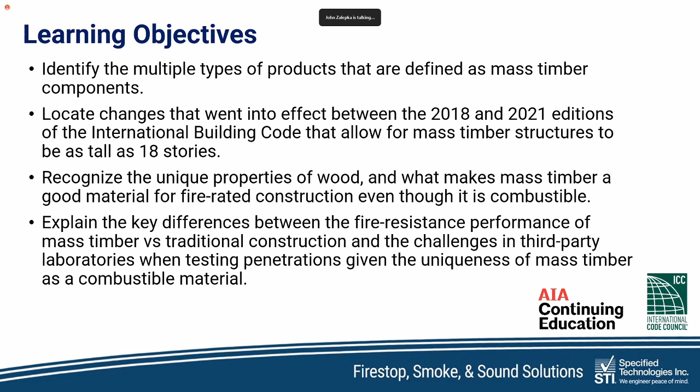At the end of today's program, you'll be able to identify the different types of mass timber components. You'll be able to locate changes of mass timber code over the last 3 years. You'll be able to recognize that even though it's combustible, there are some unique properties of wood that make it suitable for fire-rated construction. And finally, you'll be able to explain the differences between mass timber and traditional construction fire stop testing. And with that, I'll turn it over to today's presenter, Tim Mattox.

The floor is yours. Thank you, John. I appreciate the introduction and want to welcome you to today's webinar. Today, we'll be discussing fire stopping in mass timber construction.

Cross-laminated timber, or CLT, is the most common material used in mass timber projects and was developed in Europe in the early 1990s. The first noted construction project for public use that utilized cross-laminated timber was in 1996 in Austria. The first recognized commercial project in the United States was in 2016.

Growth of the industry has surged since then in light of efforts to control atmospheric carbon, and as such, major code changes were proposed for the 2021 IBC, which were adopted, significantly changing the way Type 4 construction is addressed. These code changes prompted a serious amount of attention to be focused on mass timber construction, which had been lacking before. This is especially true as it relates to fire protection, which of course is important to understand as wood is, in fact, naturally combustible.

Our conversation will begin with an overview of different types of mass timber materials used in mass timber construction today. From there, we will talk about the sheer size of some of the projects that have been built, as well as those that are being planned for the future.

Next, we will talk about code changes that happened between 2018 and 2021 in the IBC that significantly changed the landscape of mass timber structure allowances and the wood surface visual exposure limitations for each Type 4 group.

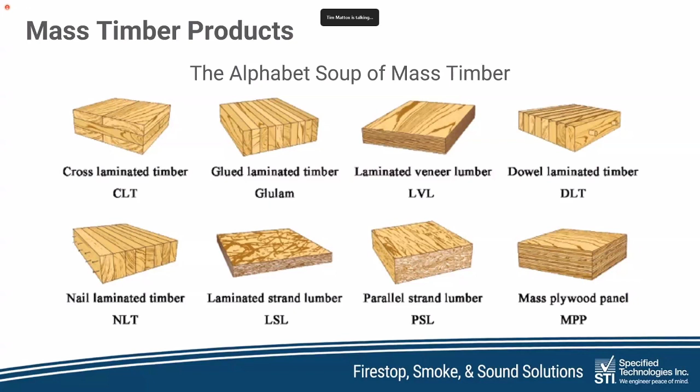If you're like me, it was not that long ago when you first heard the term CLT. Maybe the first time you heard it was in the introduction to this presentation. But what most people are unaware of is that there are several more building products on the market used in mass timber construction today. It is a bit of an alphabet soup, as all of these products are more commonly referred to by their shortened acronyms: CLT, glulam, NLT, DLT, LVL, LSL, PSL, and MPP can be present on various mass timber projects today, and over the next few slides, I will talk about these different materials and their common uses.

Let's start with the most commonly used mass timber product, cross-laminated timber, or CLT. Cross-laminated timber is a subcategory of engineered wood. It is a wood panel product made from gluing layers of solid sawn lumber together. CLT has multiple application orientations and can be used in floors, walls, and roofing.

CLT is produced with an odd number of layers. The thinnest CLT is 3-ply. The most common used in construction are 5-ply, 7-ply, and 9-ply. Individual plies can have the same thickness or can be of varying thicknesses and are always placed 90 degrees in fiber orientation on each successive layer.

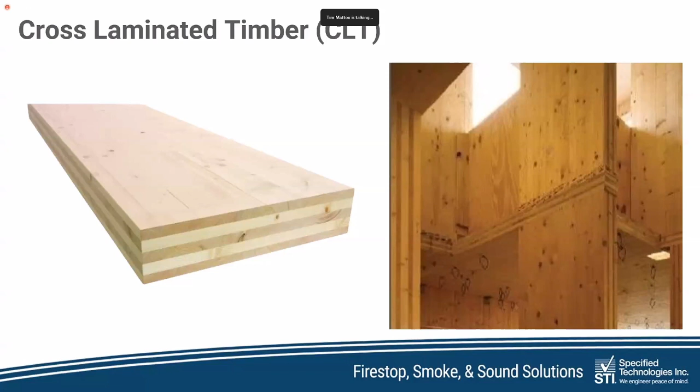To give perspective on how quickly this industry is growing, I visited a CLT manufacturing plant in Canada last year, and they informed me that their production has increased 7-fold year after year for the past 3 years running. That is not growth, that is an explosion.

Mass plywood panels, or MPP, are becoming more common. MPP is a massive, large-scale structural composite lumber-based panel designed as an alternative to concrete and steel, and actually to cross-laminated timber as well. MPP is essentially multi-tiered plywood using thin veneers that are laminated with fiber orientation alternating on each successive layer. Similarly to plywood and CLT, MPP can potentially achieve the same structural attributes of a CLT panel using 20% less wood.

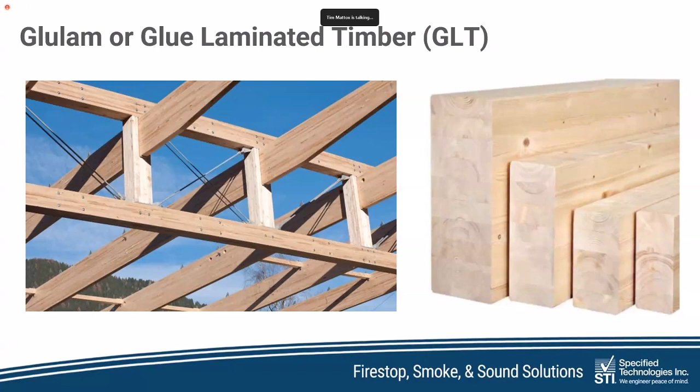Glue-laminated timber, most commonly known as glulam, is very common on all mass timber projects and is made with multiple layers of solid wood lumber bonded together with a high-strength adhesive to form a single structural unit. Glulam is oriented such that the grain of all lamination runs parallel with the length of the member. Applications include straight beams, lintels, purlins, ridge beams, floor beams, and columns. You will also see glulam for round, square, and complex sections, tied rafters, trusses, tied arches, arch supports, and curved beams.

Nail laminated timber, or NLT, uses nails to connect dimensional lumber in successive layers. NLT has multiple uses, and one major benefit is that it can be constructed on or off site and is often used to create complex shapes, such as the one shown in this photo on the right, as opposed to the straight sections you would normally find with other mass timber materials.

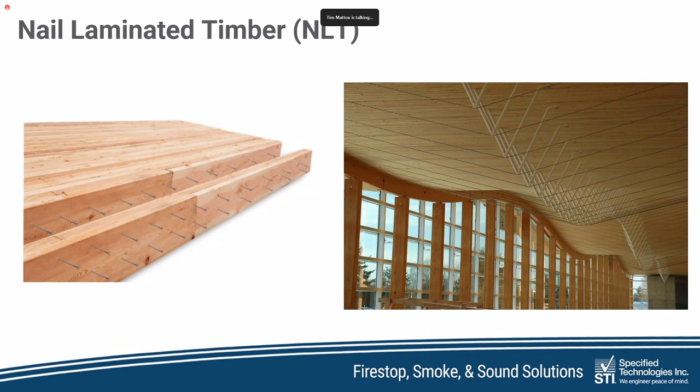A different form of mass timber product altogether is structural composite lumber, or SCL. Parallel strand lumber, or PSL, is manufactured from veneers clipped into long strands, laid in parallel formation, and bonded together with an adhesive to form the finished structural section. It is commonly used for beam and header applications where high bending strength is needed. PSL is also frequently used as load-bearing columns.

Similar to PSL, laminated strand lumber, or LSL, is made from flaked wood strands and is used in a variety of applications from studs to millwork components.

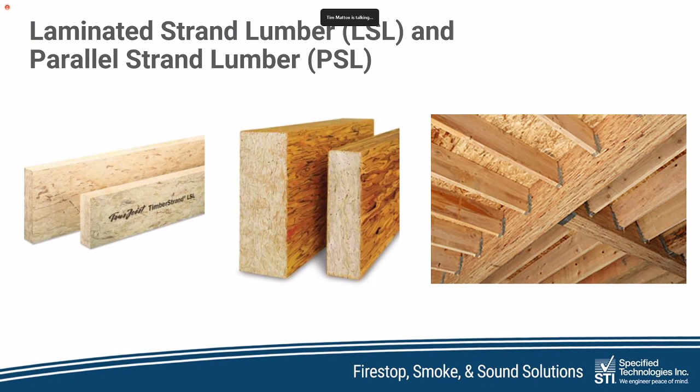Also part of the structural composite lumber family, laminated veneer lumber, or LVL, is a widely used structural composite lumber product. It is produced by bonding thin wood veneers together in a large billet so that the grain of all veneers is parallel to the long direction. LVL is a bit of a cross between mass plywood panels and glulam. It is similar to MPP in that it uses thin veneers adhered and pressed together. Although, because it is commonly used as a structural member, the wood grain is always oriented parallel to the long dimension of the structural unit, and in that way it is similar to glulam.

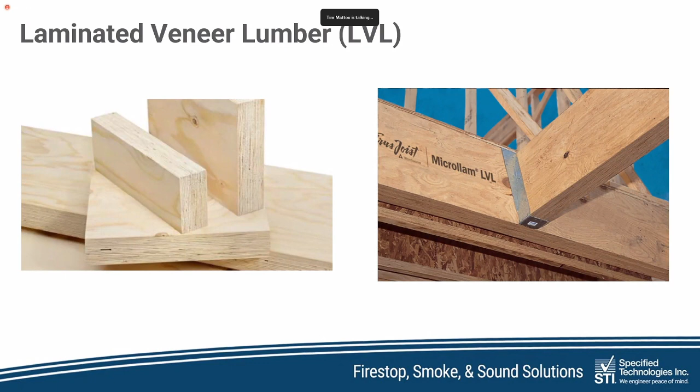Speaking of gaming enthusiasts, here's a fun memory. In the movie War Games, David Lightman tried to access a video game company server so he could hack into the new games before they were released. This fictitious company was Protovision, located in Sunnyvale.

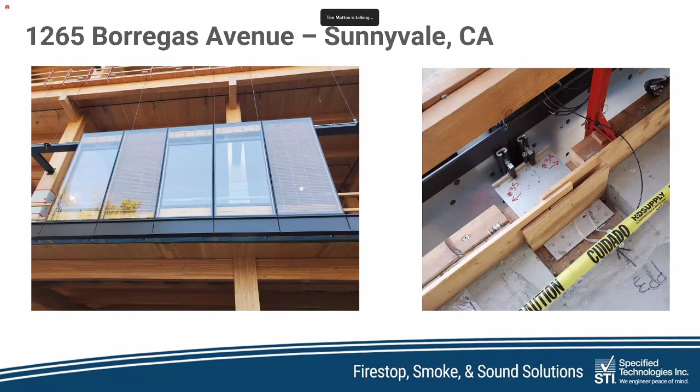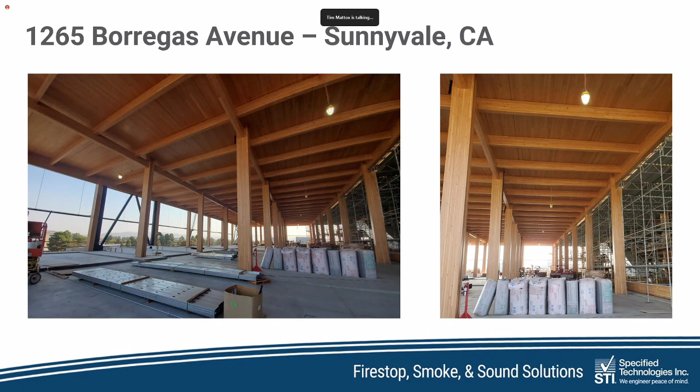These photos show the 20-foot ceiling height in the common areas of the structure, and you can see the glulam columns and beams as well as the underside of the CLT floor above. By code, these visually exposed wood surfaces can be left fully exposed, as we will see later in the presentation.

Here you can see where the glulam beams are supported by the columns and how they tie into the perimeter glulam beams. On the right, you can see the 3-ply CLT floor along with the steel pour stop for the concrete topper. On the left, you can see the gray weather barrier membrane capping the end of a 5-ply CLT roof.

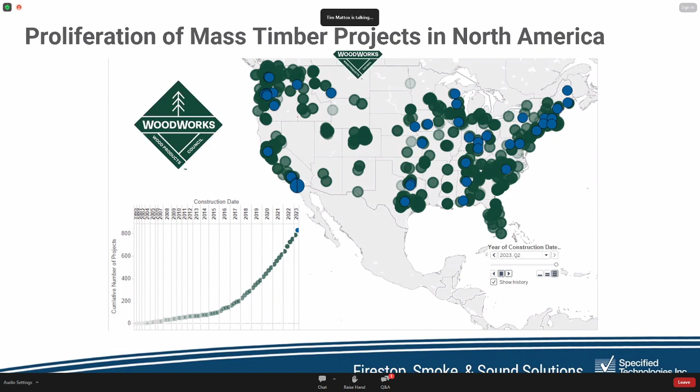From the very first mass timber structures built in North America, this chart shows how the number of these projects have increased over the years and where they predominantly exist. As of June 2023, there are a total of 1,860 multifamily, commercial, or institutional mass timber projects in the United States that are either in progress or completed. Keep in mind, the first major structure in the United States was built in 2016, and this is when the proliferation of mass timber projects started escalating in the U.S.

Now we will talk about various large-scale projects that have been constructed in the U.S. and abroad, and we will also show the largest project plans currently being looked at throughout the world. The image here is of the Cleveland Intro project in Ohio City, Ohio.

Just across the iconic Hope Memorial Bridge from downtown Cleveland, sometimes called the Guardian Bridge, namesake of the Cleveland Guardians, this building was finished in 2022 and is located across the street to the south from the famous West Side Market in Cleveland. Standing at 130 feet in height with a massive 653,000 square feet under roof, this project is not the tallest in the U.S., but it is currently the largest mass timber building in the world. It is 9 stories tall, with 7 stories of mass timber built over 2 stories of concrete podium, providing space for both commercial and residential occupancy.

Shown here are photos taken in February 2021, where you can clearly see the glulam columns and beams, as well as the 7-ply CLT floors used on this level. Below, you can see the concrete-based structure. This building services residential and commercial tenants and has been finished and occupied since April 2022.

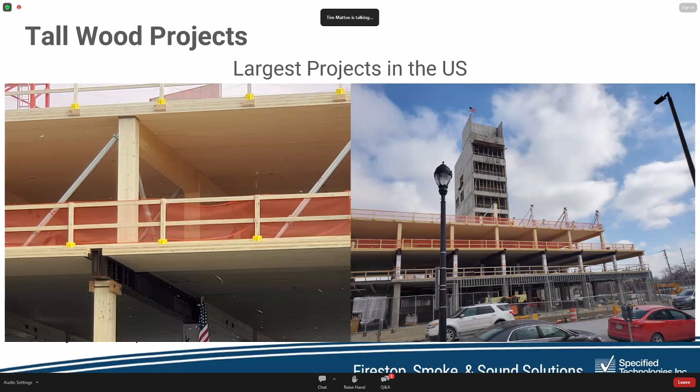This project is the Ascent project in Milwaukee, Wisconsin. It is 25 stories tall and stands at 284 feet. This height makes it the tallest mass timber structure in the world currently, but that will not last for long. It's quite interesting that both of these projects exist in the upper Midwest and not on the West Coast, as you might think.

The tallest proposed projects in the U.S. currently include the Spar project in Portland, Oregon, which would stand at 299 feet with 48 stories. Next is the Timber Towers project in Philadelphia, which would stand 62 stories tall. The tallest proposed structure in the U.S. currently is the River Beech project in Chicago, Illinois, which would stand 748 feet tall with 80 stories.

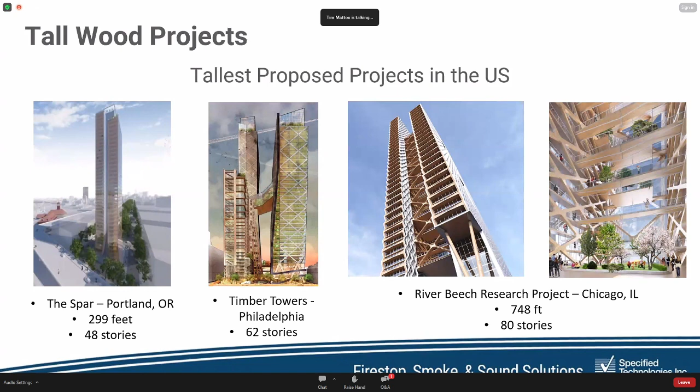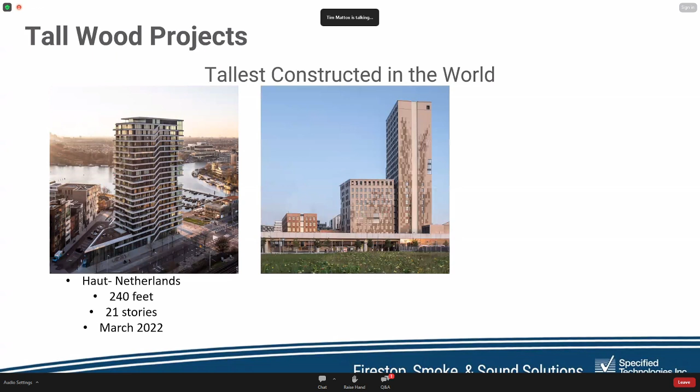The tallest mass timber projects in the world currently built, besides the Ascent project in Milwaukee, include the Haut residential project in Amsterdam, standing at 240 feet and 21 stories, built in March 2022. Next is the Hoho Tower in Vienna, Austria, standing at 276 feet and 24 stories, constructed in December 2019. And the Mjøstårnet Tower in Norway, which stands at 279 feet, 18 stories, completed in March 2019. The Ascent project stands taller than all of these at 284 feet, a mere 5 feet taller than the Mjøstårnet Tower in Norway.

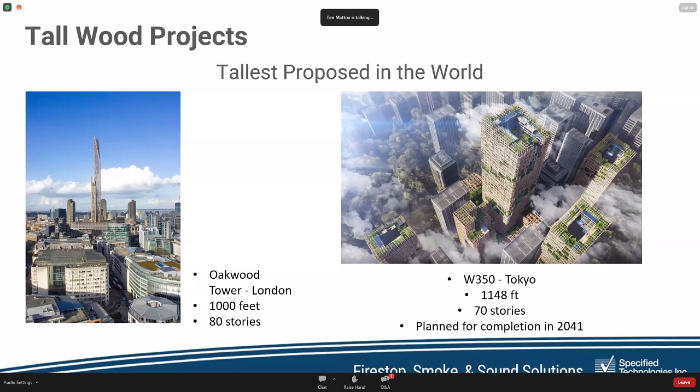The tallest proposed projects in the world include the Oakwood Tower in London. This structure would be among the tallest buildings in downtown London, standing at 1,000 feet and 80 stories. Finally, the tallest proposed project in the world is the W350 project in Tokyo. This project, when completed, would stand 1,148 feet tall and cover 70 stories. The plan is to have this project completed by the year 2041.

Now let's switch gears and talk about major code changes that took place between the 2018 IBC and the 2021 IBC that spurred much of the mass timber frenzy we see today. Shown here is Table 601 in the 2018 IBC, which highlights the required fire resistance ratings for building elements for all 5 types of construction. This section would be used to address mass timber construction for any jurisdiction using the 2018 IBC or anything before it. The major item to note is that all types of construction have an A and B group under the type, except for type 4. Type 4 shows only one header, and that is HT, which stands for heavy timber.

It is important to note that there is a difference between heavy timber and mass timber. Heavy timber is more representative of a true building type, whereas mass timber is more relevant to a material type that is set aside for Type 4 structures.

The code references here represent the entirety of CLT reference in the 2018 IBC code. In Chapter 6, there are two references for different types of materials that can be considered under Type 4 construction, and surface covering materials required to be placed over CLT. Chapter 7 addresses the calculation of fire resistance for visually exposed wood members and wood decking, but does not mention mass timber elements by name. The rest of the references in Chapter 23 are simply specifications on minimum thickness requirements when CLT is used in specific applications.

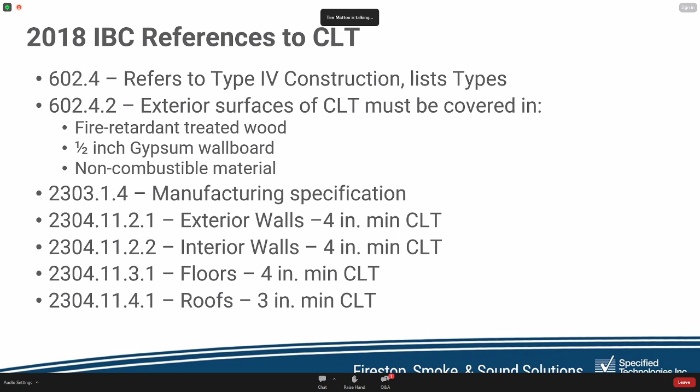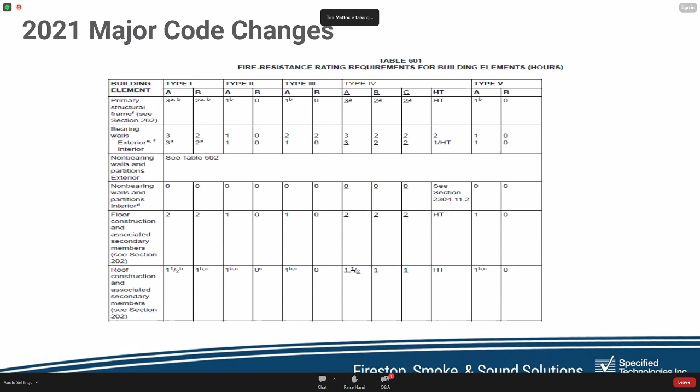Switching now to the same table in 601 of the 2021 IBC, you can see there are some major changes. No longer is Type 4 the only construction type that doesn't have two subtypes under the Type 4 header. Now there are four subtypes to include types A, B, and C, along with the HT designation that already existed. However, mass timber construction is not limited to Type 4 - that is simply a dedicated building type for a complete mass timber project. In fact, you could find mass timber projects within this entire window of building types. One major difference between Type 4 and other types is that the horizontal separation requirements for all Type 4 construction are 2 hours, whereas in Types 3A and 5A, for example, the minimum requirement is 1 hour.

Proposed changes added types A, B, and C to the height tables and allowable stories. With the changes, Type 4C can be built to 9 stories at a maximum of 85 feet.

Excuse me, I've got a phone ringing in my room here.

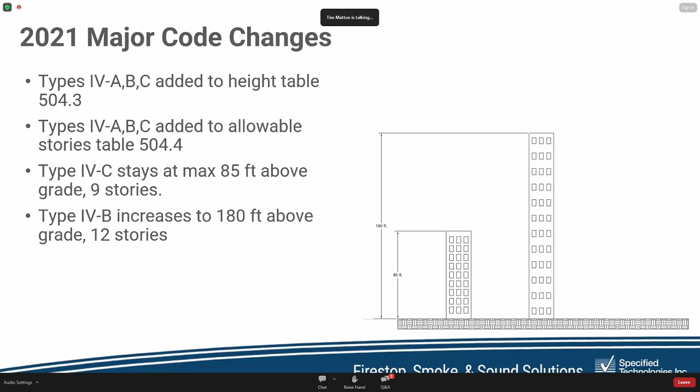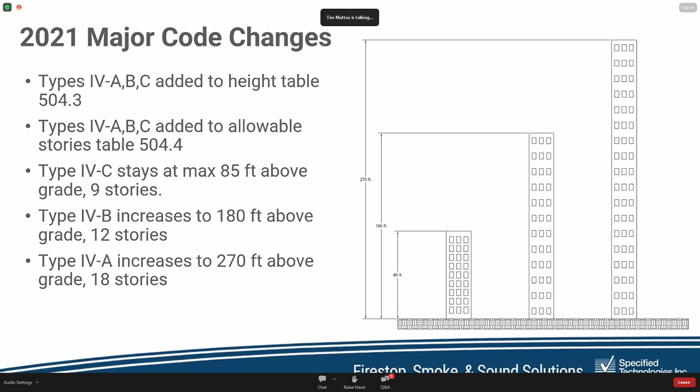Type 4B increases that maximum height to 180 feet and 12 stories. Finally, Type 4A allows heights up to 270 feet with 18 stories. The maximum allowances are contingent upon the occupancy type. These listed here are the maximum allowable for qualifying occupancy types.

The first major proposed change set the requirements for the allowable visual exposure for each of the new types of mass timber construction. The tallest of the group, Type 4A at 270 feet and 18 stories, requires that all walls and ceilings must be fully protected, and the finished floor must include a minimum 1 inch of non-combustible material in conformance with Section 804 of the code.

Type 4B at 180 feet and 12 stories allows for up to 20% of the ceiling to be visually exposed, or an equivalent of 40% of the floor area to be allowed to be visually exposed on walls or columns. So if you have 1,000 square feet of floor space, 200 square feet of ceiling, or 400 square feet of wall surface can be left visible. You can also have a combination of ceiling and wall visually exposed as long as it follows the mixed unprotected area exposure formula in the code. The floor must be protected with a non-combustible topping, as it is in Type 4A.

Type 4C is much simpler. For any structure 9 stories or less and 85 feet or less above grade, there is no requirement for any surface to be covered - you can leave walls, columns, and ceilings fully visually exposed. The floor finish is not required to be non-combustible, but must be in compliance with Section 804 of the code.

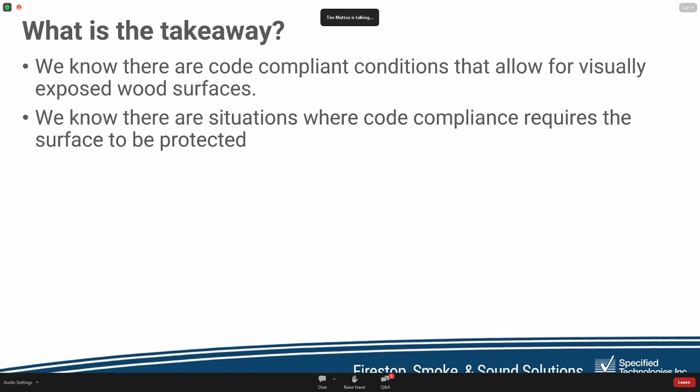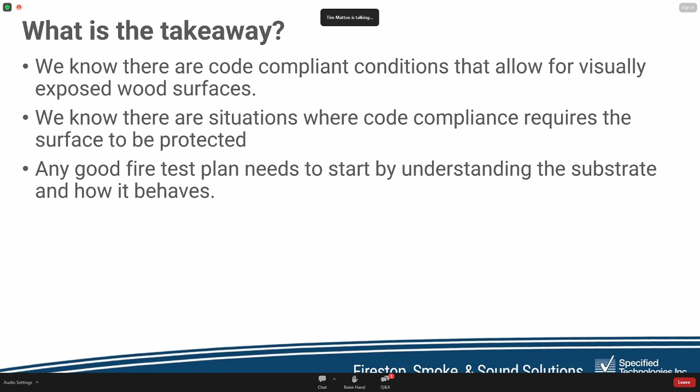From the new allowances in the code, we understand that there are code-compliant conditions that allow for wood surfaces to be completely visually exposed. We also understand there are situations where code compliance requires that the surface be protected. Logically, it follows that in order to develop a good test plan, there really needs to be a fundamental knowledge of the material you're working with, how it behaves as a construction material, and more importantly, how it behaves in a fire. In the next few slides, we will look at some of the fundamentals of how wood behaves.

The first lesson: wood is good, but strange. I cannot take credit for this statement. Back in 2009, Dr. Joe Lstiburek, one of the premier building scientists in North America and principal of Building Science Corporation, wrote an article with this title. It is a fascinating article and one that I highly recommend reading.

In his leading statement, he said if someone invented wood today, it would never be approved as a building material. It rots, it burns, it has different strength properties depending on its orientation, no two pieces are alike, and most cruelly of all, it expands and contracts based on relative humidity.

I'll summarize some of what Joe wrote in his article, discussing what happens when wood is warmed, when it is exposed to humidity, and why this is important both from an architectural standpoint as well as a fire protection standpoint. We will also look at answering the following questions.

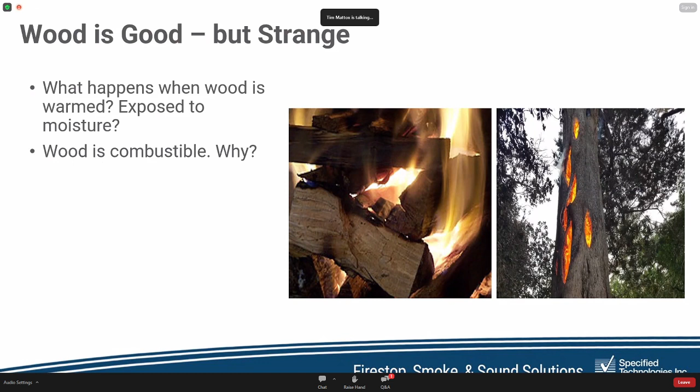What about wood makes it combustible? It almost always has a considerable amount of water within its cellular structure. Isn't that a good thing? What are the differences between mass timber when compared to more traditional construction?

How does it compare to wood framed construction? How is fire resistance calculated in CLT floors and walls? How does it hold up structurally as the wood is consumed? Doesn't it lose strength? Finally, we will ask what aspects of wood make it a good construction material, considering its natural combustible nature.

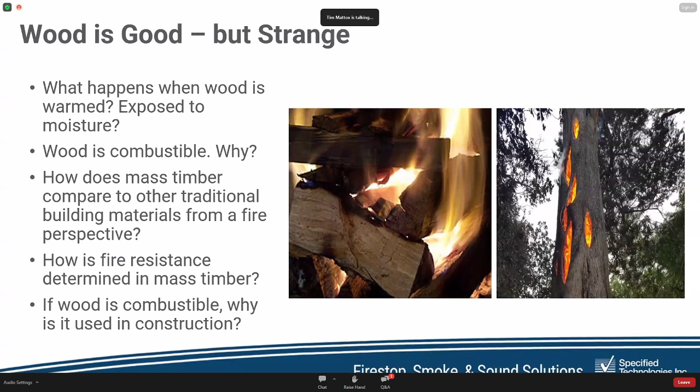So let's look at wood and why it is good but strange, and we will start with its relationship with relative humidity. Wood is hygroscopic, which basically means moisture content in wood adjusts to atmospheric changes in relative humidity. I will be saying relative humidity a lot, so from here on out, I will call it simply RH.

Why is this important? Well, if you're an architect, you may want to understand how this can affect the dimensional stability of the wood. Wood expands at a much higher rate perpendicular to the grain than it does parallel to the grain. This means if you're using dimensional lumber framing and RH increases, the length of the stud will not vary much, but they will get wider and thicker.

Fortunately, with engineered wood such as CLT, the fibers are oriented perpendicular with each successive laminate layer, and this does create some stability in this regard. If you are a fire protection engineer, however, you may be less concerned about dimensional stability and more concerned with moisture content, in particular lower moisture content.

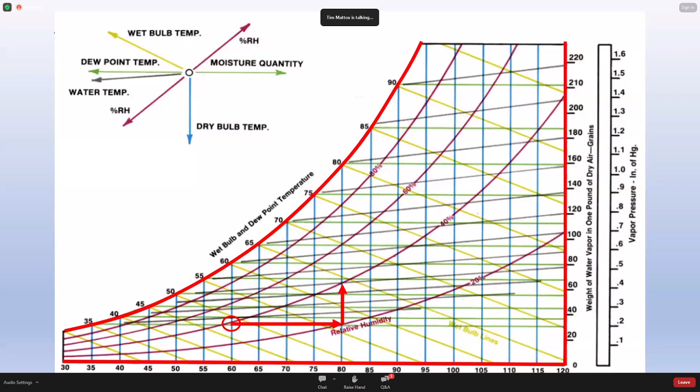Wood dimension responds differently than other building materials because it is affected by changes in relative humidity instead of temperature. That is important to know in designing wood for use in buildings, but no less important to the fundamentals is understanding how and why wood burns.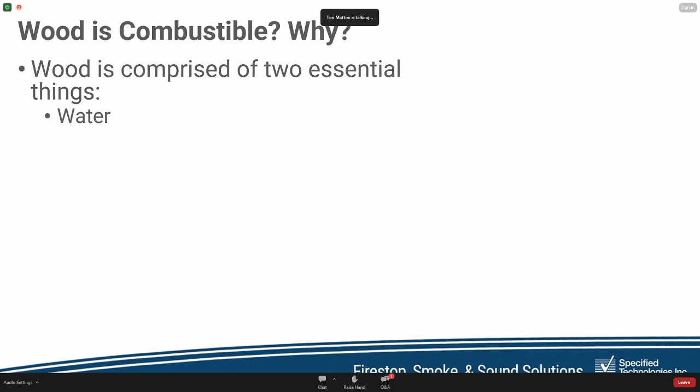Let's start with the why. Wood is comprised of two essential elements. First is water. Wood will always have some level of moisture because it comes into moisture equilibrium with the environment. Fresh cut lumber can have moisture content as high as two times the mass of dry wood. After wood is dried for lumber, the normal moisture content lies between 8 and 25%.

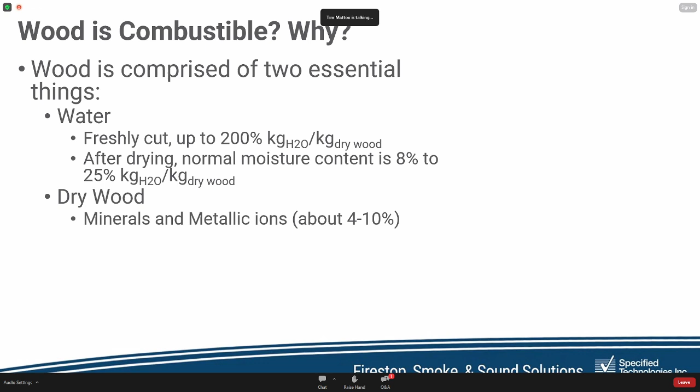Now we're talking organic polymers. That sounds combustible, and it is. This is the core combustible material found in wood. These polymers are comprised of lignin, which is about 18 to 35%. Lignin is the kind of glue that holds everything together.

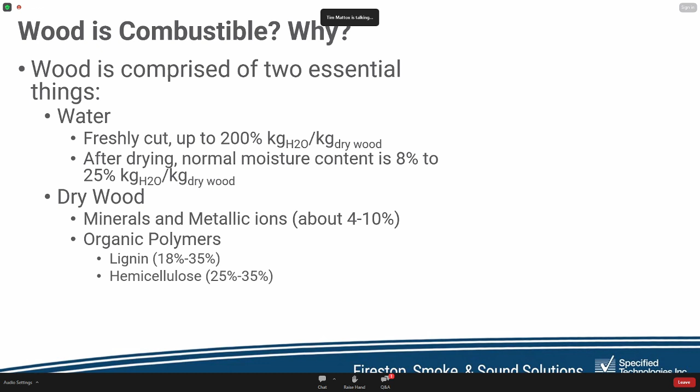Then the cells are made of hemicellulose at about 25 to 35%, and finally cellulose, which makes up about 50% of the dry wood. Very simply, hemicellulose and cellulose are sugars, and sugar is quite combustible.

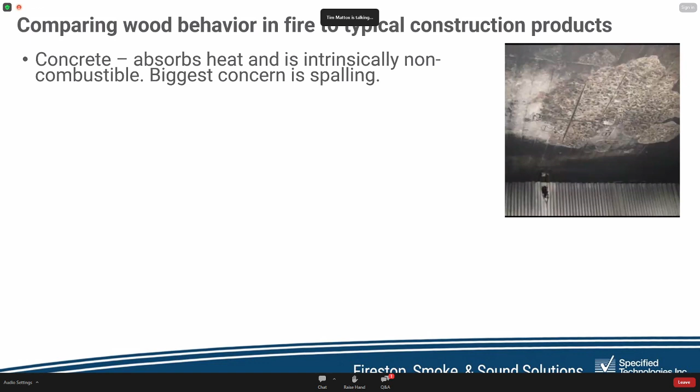Let's look at some other materials and how they compare when exposed to fire conditions. Concrete is very simply a massive material that absorbs a ton of heat. None of the components that make up concrete are combustible, and the biggest concern for concrete in a fire is explosive spalling if the moisture content is too high. Concrete does exhibit some expansion with heat, especially if there's steel embedded in the concrete close to the heated surface.

Gypsum wallboard is a very interesting material. The way gypsum works and why it is an excellent material for fire protection is that the gypsum, or calcium sulfate molecule, has water molecules chemically bound to it in its natural form. It is dry to the touch, but when exposed to heat, gypsum will release the water molecules in a process called calcining, and the released water will convert to steam, which cools the assembly close to the boiling point of water and well below cellulosic ignition temperatures.

The calcium sulfate is a non-combustible mineral base. The water molecules serve as a bit of a binder, so when they are gone, the gypsum is essentially powder that has little to no structure.

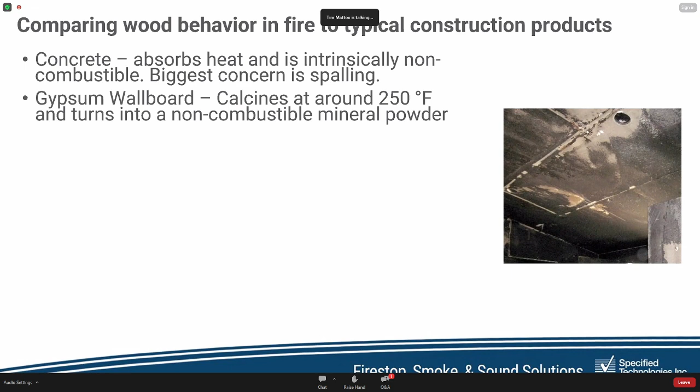Steel expands fairly rapidly as it heats. Steel will retain a significant portion of its strength up to about 1,000 degrees Fahrenheit, when it will start to exhibit plastic deformation when under load. This is why fire test standards for testing fireproofing materials use 1,000 degrees Fahrenheit as the failure criteria. Steel melts at about 2,600 degrees Fahrenheit.

Dimensional wood has been used as a framing material for years, but the frame is encapsulated by various materials, usually gypsum wallboard, to provide the fire-resistive element.

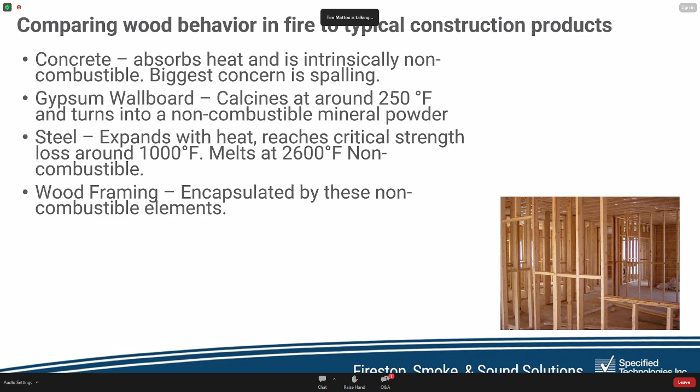Conversely, mass timber surfaces will ignite at around 500 degrees Fahrenheit and start to produce char. The base char rate for CLT, per the National Design Specification for Wood Construction, or NDS, is 1.5 inches per hour. But for design purposes, the effective char rate is used, which ranges from between 1.8 and 2.2 inches per hour, depending on the thickness of the plies.

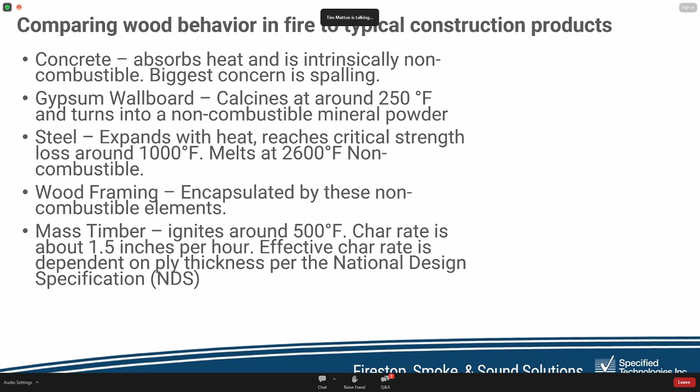When designing for load bearing with mass timber, you always want to end up with enough wood to carry the design load after the prescribed fire resistance time has elapsed. When you are designing for fire resistance with mass timber, you start with the design load, and then you use the char rate calculation tables in Chapter 16 of the NDS.

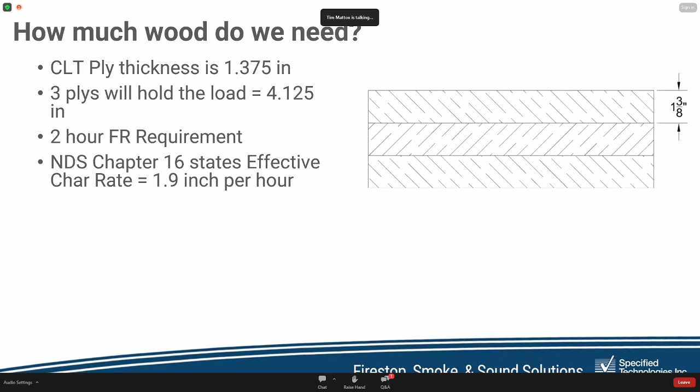Here's an example on how this may be calculated using CLT with 1 3/8 inch plies. Say your design requires 3 plies of wood to maintain the design load, and you have a 2-hour rated design requirement. NDS Chapter 16 indicates that the effective char rate of 1 3/8 inch ply CLT is 1.9 inches per hour.

1.9 inches times 2 hours is 3.8 inches, and you can see we are well into the 6th ply at this point. At the moment, we have calculated that we need 3.8 inches of effective char, coupled with the 4 1/8 inch thickness to hold the load.

So we are at 7 15/16 inches. 7 15/16 inches divided by the ply thickness of 1.375 is 5.76 plies. So we've calculated we need 6 plies, but remember from the CLT discussion, CLT is only manufactured in odd ply numbers, so we actually need 7 plies to meet this design criteria.

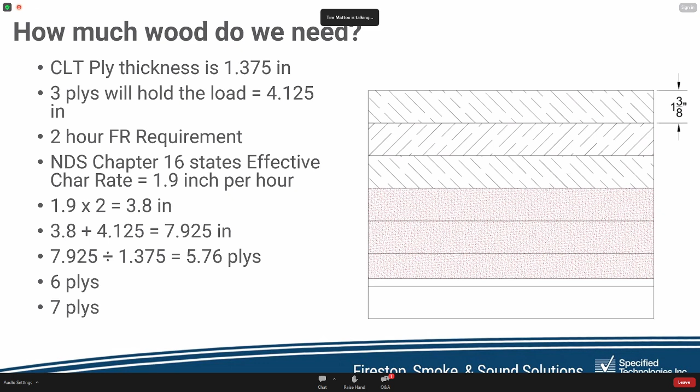So why should we use wood if it burns? It's a good question. For starters, wood burns in an ablative process. This photo very clearly shows this glulam beam on the left is untouched, and the one on the right has obviously seen fire, but yet the core of the beam looks identical to the one on the left.

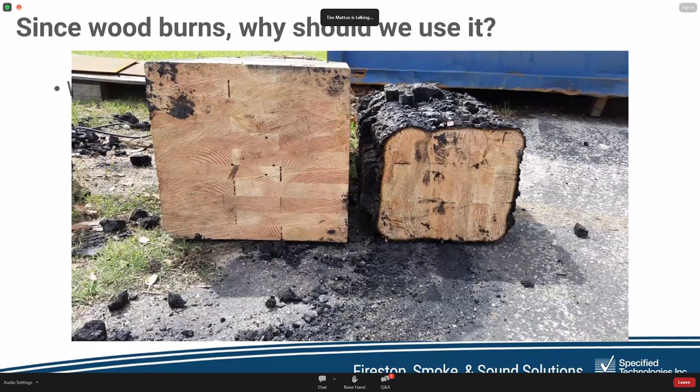Wood first forms a char layer, which is essentially all carbon mixed with the minerals intermixed. The carbon layer is solid, but it has lost much of its structure. The carbon then burns away, leaving the minerals or ash that has no structure. The ash falls away or sloughs away to reveal the new char layer below that has already started as it supports combustion. But as well, the virgin material below is still protected. This process repeats, and this is what we call an ablative process.

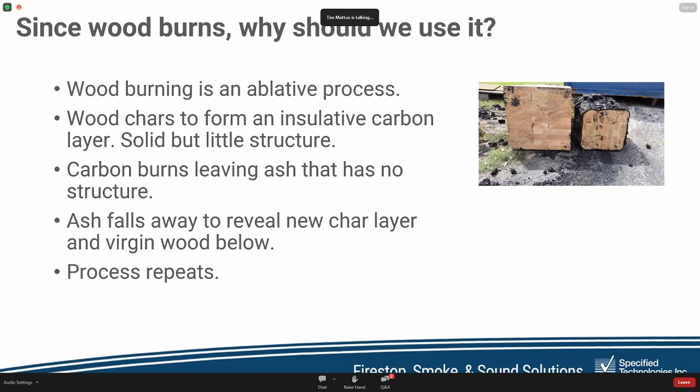There are essentially three stages of wood burning. The first stage is called the smoking stage, when the wood begins to lose its moisture. Some will be lost to the fire, other moisture will be driven inside, which preserves the core virgin wood. CO2 is released, and this process happens until the wood temperature is about 400 degrees Fahrenheit.

The second stage is called the pyrolysis stage. This is when you have the realization that your campfire is burning on its own. Pyrolysis is the conversion of the combustible compounds in the wood to volatile gases, and this is what supports the flaming and further breakdown of the wood. This happens between 400 Fahrenheit and 850 Fahrenheit.

The final stage is called carbon burn, and this is where the carbon is turned into carbon dioxide and carbon monoxide, leaving nothing but the ash or any other char or virgin wood that may be involved in other stages at any given time.

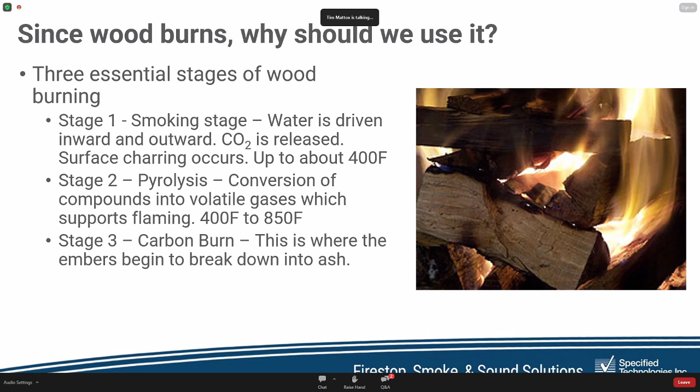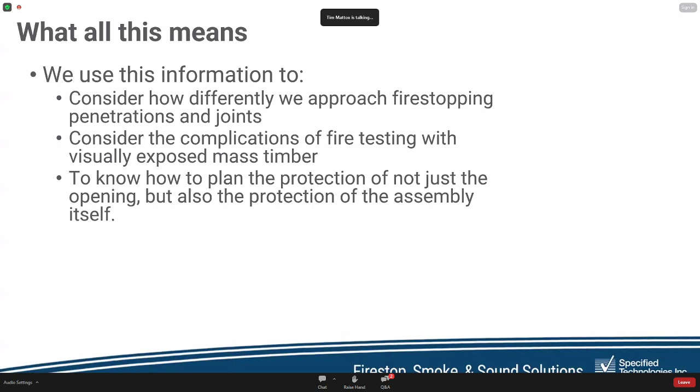When we look back on these behaviors of wood, what does it all mean? How can we use this to understand how to properly fire stop? Well, we use this information to carefully consider how we approach fire stopping penetrations and joints. Should we include protection within the annular space in a way of insulation? Can we use point contact? How is the mass timber assembly going to behave differently than a concrete slab or a gypsum wall? Should we protect the assembly or leave it fully visually exposed? In other words, we actually still have a lot to learn.

So all of this is interesting, but how do we apply what we have learned to testing penetrations or joints for that matter? Well, in putting a test plan together, the first thing we had to discover for ourselves was how long of a duration we could expect. We know how to calculate fire resistance per the NDS, but practically speaking, we needed to know when a fire was going to start peeping through the assembly. How long will it last unprotected?

Well, this is important to know because sometimes ceilings do not require protection. How much additional time can we expect when adding a layer of gypsum wallboard to the ceiling? Again, this is important because some ceilings do require protection. What types of penetrating items would be good to analyze in determining how we might do things differently with CLT versus the concrete floor assembly? Finally, how do we push the limits of these test assemblies successfully?

Like all good plans, you have to know where to start.

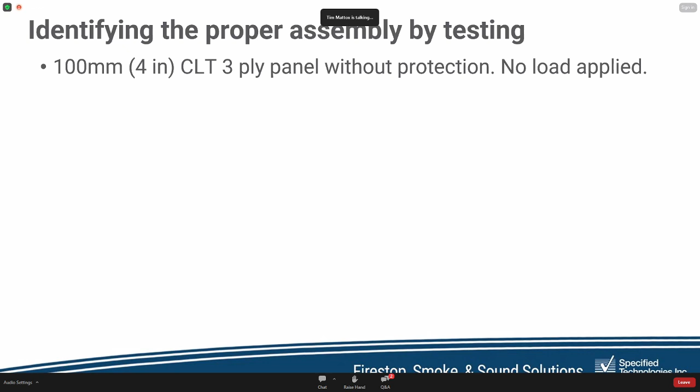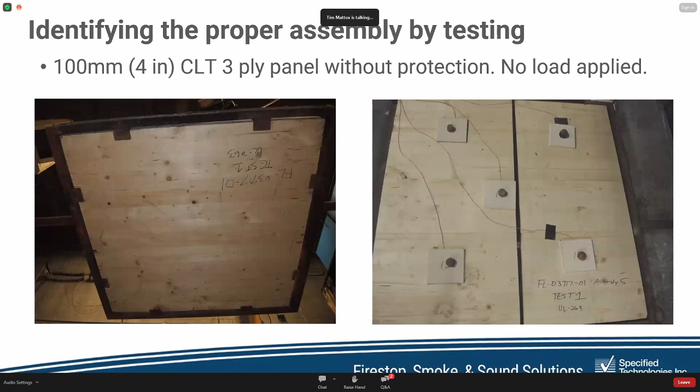Recently, we ran some fire tests on 100 millimeter 3-ply CLT floors. To start, we wanted to understand how long this assembly, without protection, would last under fire exposure for the ASTM E119 time-temperature curve. The photo on the left shows the underside, or exposed side, of the CLT floor. The right side shows the top, unexposed side of the assembly. You'll notice pads weighted down with steel blocks and wires leading out from under the pad.

These are the thermocouples used to measure the unexposed surface temperatures as the fire test proceeded. The end of the test was marked when we noticed flaming on the unexposed surface at 90 minutes into the test. The maximum surface temperature rise was only 199 degrees Fahrenheit, a full 126 degrees lower than the standard allows. That goes to show the excellent thermal resistance of CLT.

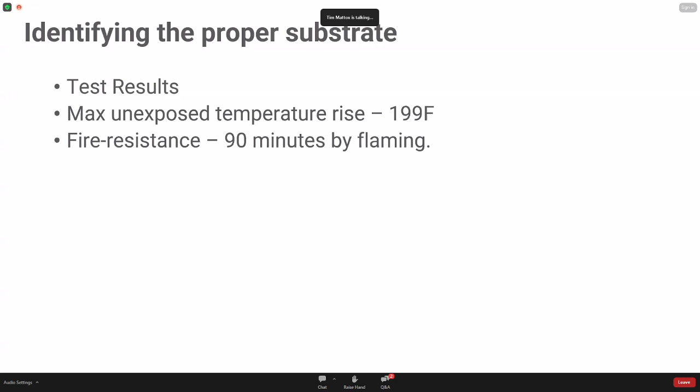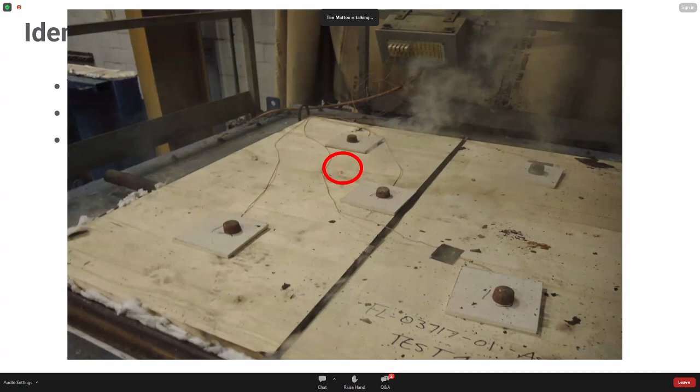The flaming occurred on a seam between the CLT boards on the top ply. It may be difficult to see, but look for the light orange glow at the center of the red circle. The center photo shows the flaming about 5 seconds after the flame first appeared on the unexposed side. This is a photo of the assembly as it's being lifted off the furnace.

As you can see, it is fully involved, and you're seeing every stage of wood burning. The ash has already fallen into the furnace floor, so at some point carbon burn was complete. You also have carbon burning, pyrolysis, as well as smoke stage burning occurring on the top surface.

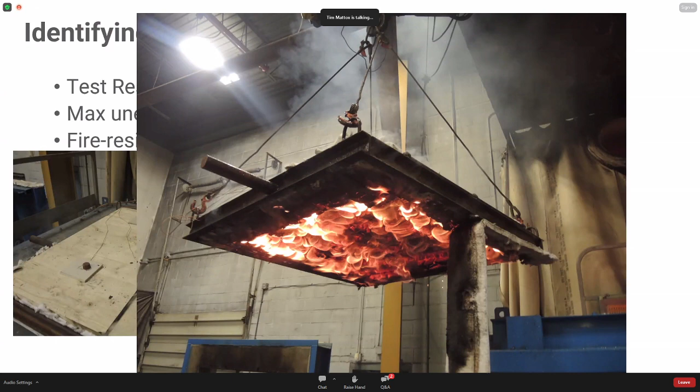This graph shows the temperature as measured in the furnace compared to the E119 time-temperature curve. The orange line is the E119 time-temperature curve for the assembly 1 test. As you can see, there was a deviation in the furnace temperature that began around 45 minutes into the test. This is likely due to the ablative nature of the wood burning, and when the char had sufficiently attacked the first adhesive bond layer to cause delamination.

This exposed a fair amount of slightly charred underlying wood immediately. Immediately afterward, the wood from the second ply became involved, and the heat generated by the fresh wood outpaced the heat energy from the furnace fuel, causing this deviation. So between 45 minutes and roughly 80 minutes into the test, the furnace gas was shut off and the furnace temperature was driven by the fuel from the CLT. Internally, we call this secondary flashover.

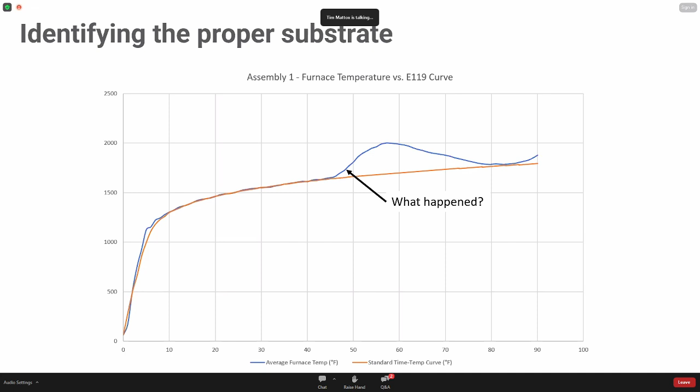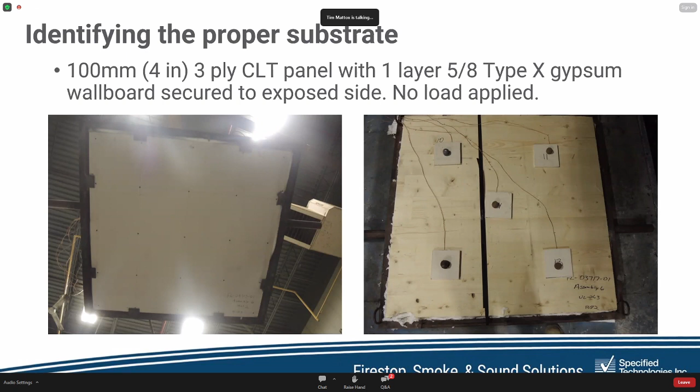Since the unprotected assembly only passed 90 minutes, it was decided to run a second assembly with a single layer of 5/8 inch Type X gypsum wallboard mounted to the underside. The photo on the left shows the exposed side of the test assembly, showing the screws securing the wallboard, spaced on a 12-inch by 12-inch grid. The photo on the right shows the unexposed side of the assembly prior to the test, fitted with 5 thermocouples in the same locations as the first test.

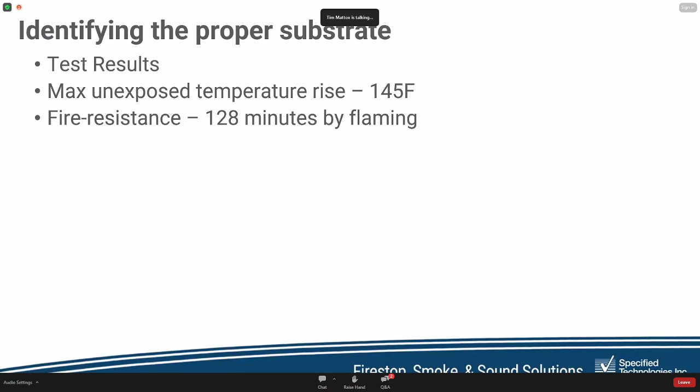The end of the test was marked when we noticed flaming on the unexposed surface at 128 minutes into the test. The maximum surface temperature was only 145 degrees Fahrenheit, or 180 degrees lower than the standard allows. With the addition of the gypsum wallboard, there was a significant improvement in the thermal resistance of the test assembly. Prior to failure, wood resin was seen bubbling to the surface.

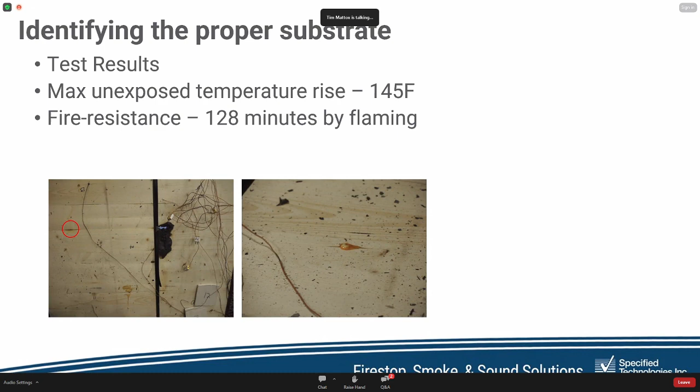Shortly after this occurred, charring could be seen at the seam between the top ply boards, which then ignited within seconds after this photo was taken. This is what the assembly looked like as it was being lifted off the furnace, and you can still see remnants of the gypsum wallboard hanging on at the perimeter.

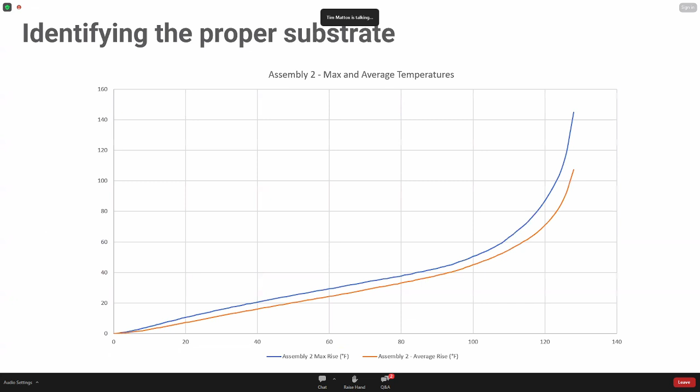This is the graph of the thermocouple data on the unexposed side of assembly 2. The two curves indicate the maximum temperature on the unexposed surface, charted the same way as the first assembly. The temperature rise was fairly linear until about 107 minutes into the test, when the rate of temperature rise began to increase. Interestingly, the difference between when the rate started to increase and the point of failure was identical to assembly 1, at 21 minutes.

The temperature rise data between assembly 1 and assembly 2 were analyzed and compared to determine the fire resistance benefit of adding a single layer of gypsum wallboard to the underside of the assembly. The data showed that adding the single layer increased the fire resistance of the assembly by 38 minutes.

Table 722.2.1.4 in the building code provides fire resistance times assigned to various finished materials when applied to the exposed side of assemblies. Care to guess what time is assigned to 5/8 Type X gypsum wallboard? 40 minutes.

So from these experiments, we are offered evidence to support a couple conclusions. First, the predictability and repeatability of burning CLT assemblies seems to be very consistent. Second, the finished materials table in the code appears to be very reliable as a source in determining what finishes add to CLT assemblies from a fire resistive standpoint.

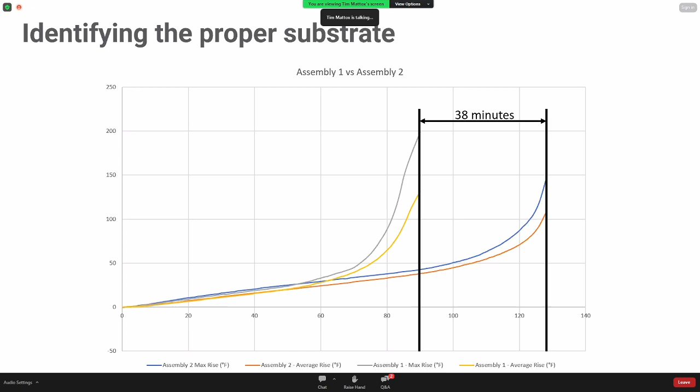And while these experiments are not a large data set and firm conclusions cannot be drawn from them, it is refreshing to see that they do not contradict expectations of performance. Not surprisingly, the furnace data showed a similar result from the first assembly with an almost identical deviation in both magnitude and duration. It's just shifted 38 minutes from when the deviation occurred from the first assembly to that of the second assembly.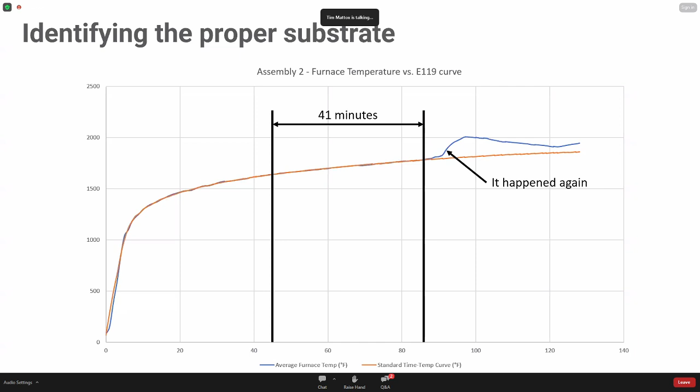Most everyone that has been through the basics of Firestop training has learned how to identify specific systems in the UL directory and what the various alphanumeric characters mean. So I'm not going to spend a great deal of time on this, but just as a refresher, here is an example: system CAJ 1464 has 3 definitive sections that each have a meaning. UL has done a nice job with the cataloging system, so you know by system name specifics as it relates to the assembly and the penetrating item.

At this time, other testing and listing agencies use a different convention that does not identify substrates or penetrating items by the system name, but they do have listings. The first alpha group indicates the floor, wall, or combination of floor and wall, so immediately you know the orientation as vertical or horizontal. In this case, C would indicate that this system can be used for a floor or wall penetration, as it is a combination system.

The second alpha group indicates the type of construction that is penetrated. In the case of CAJ 1464, it is a minimum 5-inch concrete floor or an 8-inch concrete or masonry wall. The first number in the numeric section identifies the type of penetration. In this case, the system identifies this as a metallic pipe, conduit, or tubing penetration.

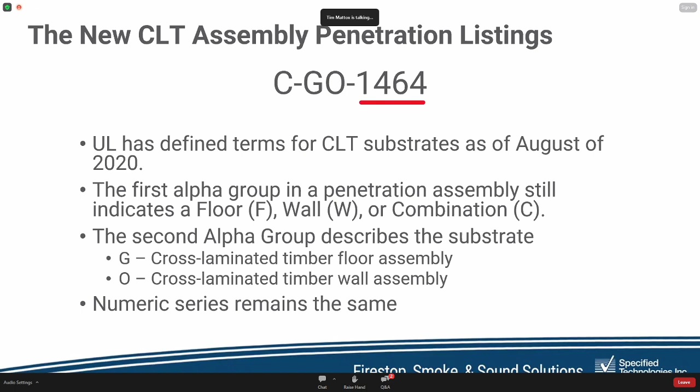There will be some differences you will notice with CLT penetration listings, and some things will be familiar. CLT listings will have the following requirements at a minimum. First, any approved CLT assembly must be manufactured in accordance with the ANSI APA PRG 320. This ensures a minimum standard of quality for the CLT that is approved for these systems. Next, the slab thickness will be designated as a minimum, which is familiar.

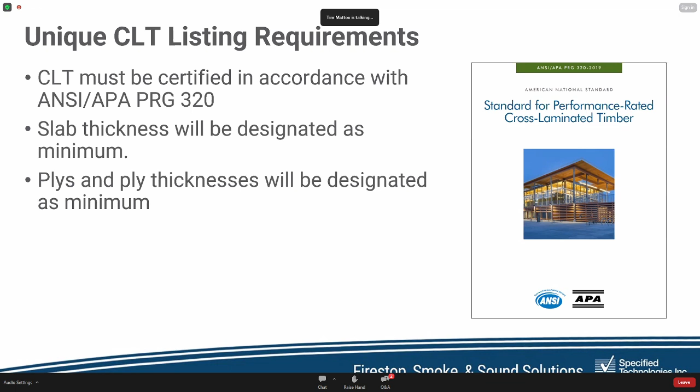One difference: because CLT is a laminate material and fire resistance calculations have a dependency on ply thickness, both the number of plies and ply thickness will be specified as a minimum. Finally, any protection that will be required or in some cases optional will be listed as such. These protective materials will typically be gypsum wallboard, at least as we get out of the gate.

We're happy to state that STI has 12 relatively new listings with Intertek, as shown in the table on the right. Among the penetrants we have are 4-inch PVC and ABS pipe, AC line sets, cable bundles, metallic pipe, insulated metallic pipe, and blank openings.

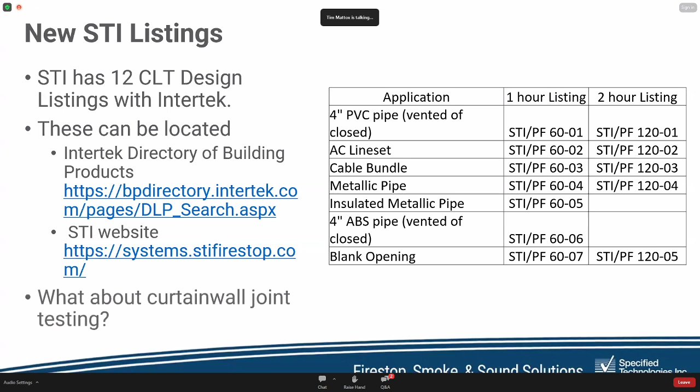Some nice features of our listings include optional protection for CLT floors, having a minimum thickness of 4 inches with 3 plies for 1 hour, or 6-inch 5-ply for 2-hour rated systems. These systems can be located both in the Intertek directory of building products and on the STI website Firestop System search page. You might be wondering, can you test a perimeter fire barrier system with CLT?

The answer to that question would be absolutely yes. STI has released one system already, and we will be releasing 3 total CLT perimeter fire barrier systems in the very near future through Intertek, and we have plans to continue with more tests this year. Here you can see an example of our first test assembly for perimeter fire barrier utilizing CLT.

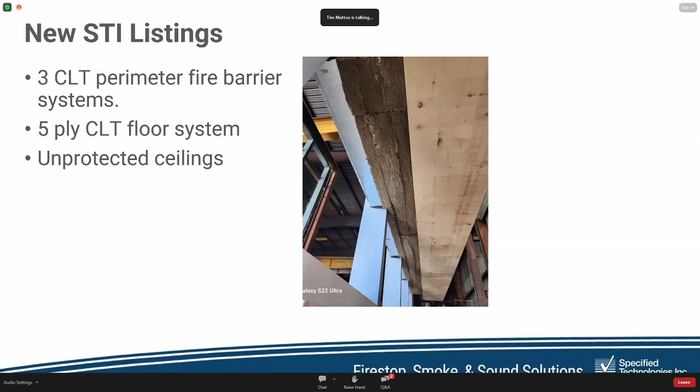The first thing you'll notice here is that there's not a protective membrane on the ceiling. Other systems that have been tested require the user to install not 1 or even 2, but 3 full layers of 5/8 Type X gypsum wallboard at the ceiling. While that is a safe measure, it certainly doesn't provide the benefit of the biophilic design we discussed at the start of this presentation, the one where that's a major draw of building with mass timber.

Also, testing with no floor covering means all code acceptable options for floor toppings are on the table. In other words, if you have a type 3A or B structure with mass timber, type 4 A, B, or C, or type 5, and you want that beautiful wood grain showing like most owners and occupants will want, you will only have to reach out to STI and we'll be glad to work with you.

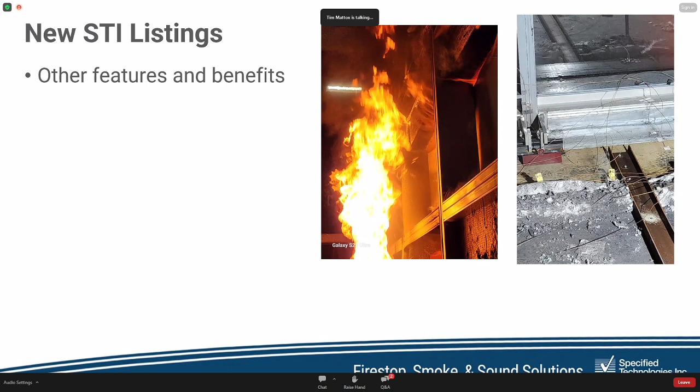While we're at it, there are a few more feature benefits these systems will showcase: shortened raised spandrel valence back pans that allow you to go as tall as you want, but you can get down to 8 inches for full floor to ceiling glass systems. Up to 8-inch wide joints - while joints in mass timber construction rarely go that wide, STI does have it covered in the event that it does. Unitized or field installed system capable.

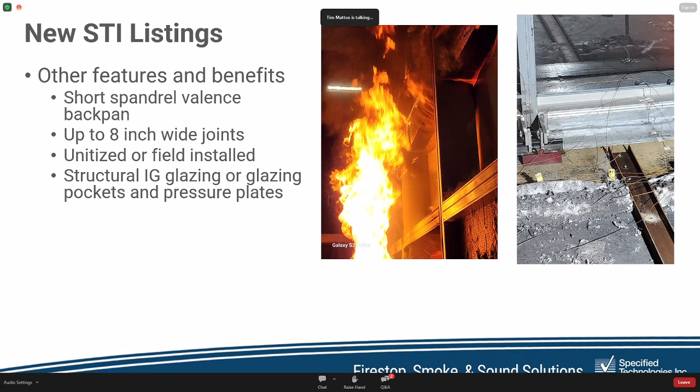Structural silicone IG glazing or preferred gasketed pressure plate glazing. Optional weather resistant joint seals. Optional alternative insulations below the back pan, in the event additional thermal protection is desired. Optional floor toppings in conformance with the requirements. Optional spandrel covering materials. Optional wall elements including kiss mullions, wind load anchors, intermediate transoms, architectural cover plates, thermally broken back pan design, hybrid window wall applications, and there are more to come.

There are some excellent online resources to learn about mass timber construction. Woodworks organization, or woodworks.org, is an amazing reference for all things mass timber, including structural, environmental benefits, as well as fire protection. American Wood Council would be a source where you would locate the ANSI NDS 2018, where Chapter 16 refers to the calculations for determining fire resistance of mass timber elements. The Engineered Wood Association is where you would access the ANSI APA PRG 320 document, and that download happens to be free of charge. There are many other sources, but these three have amassed a significant amount of information available for further education in mass timber.

And finally, a fascinating website to nerds like myself who want to learn more about how wood behaves, among many other things, is the Building Science Corporation, which includes a massive library of building science-related training and articles that are all available at no charge.

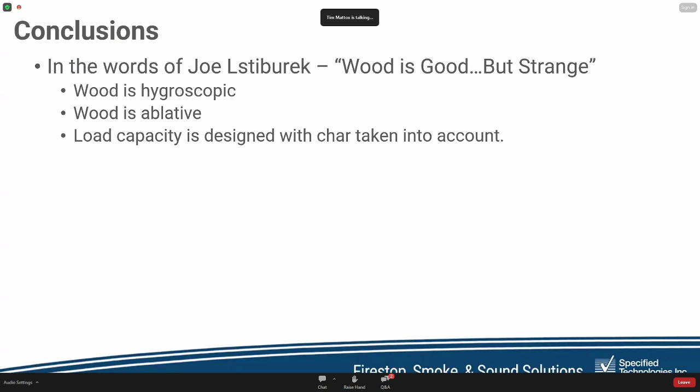In conclusion, I'm extending a thank you to Dr. Joe for his excellent source for all things related to building science and his article on how wood is good but strange. We learned that wood is hygroscopic, so it accepts and rejects water based on ambient conditions, and as a result, changes in dimension - but most importantly for fire protection, moisture content. Wood is ablative, and so that makes it a good material for fire-resistant construction. You just have to design char depth into the calculation for fire resistance. PRG 320 is the minimum requirement of quality standard that can be used for fire stop listings.

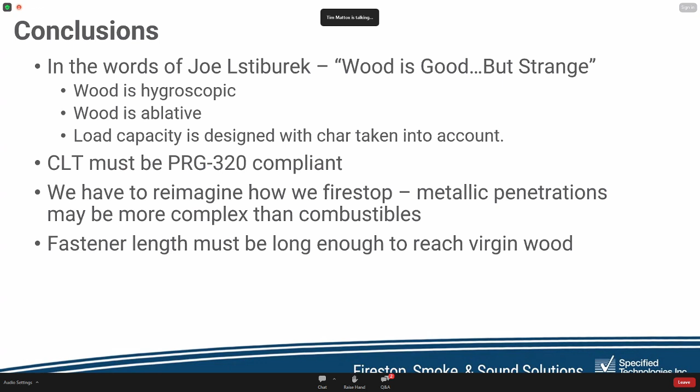We really have to reimagine how we approach fire stopping in CLT. Metallic penetrations may offer new challenges that are not present in other types of construction. When fasteners are used for protective layers or devices, they must extend into the wood that would be uncharred for the desired rating. Point contact systems will be a struggle to achieve, but we at STI will always push for that envelope. And finally, insulating against radiative heat will be key in some systems, and this really ties to the limited point contact difficulty. That is all I have for you today.

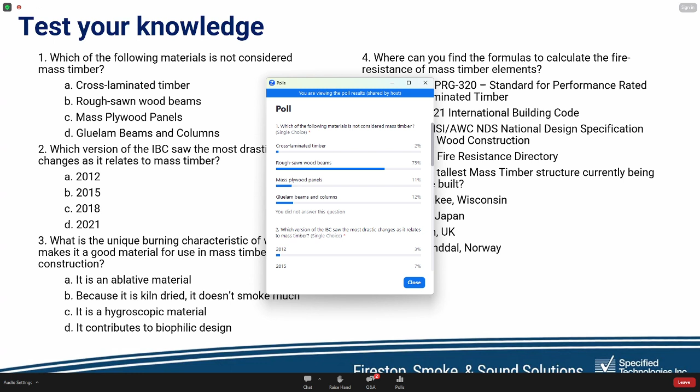Number 1: which of the following materials is not mass timber? Rough sawn wood beams - that's correct. 75% of you got that one right.

Which version of the IBC saw the most drastic change? And we were changing to 2021, so 62% of you got that right. 28% of you got 2018 - so might have been a little bit of a trick question, but Tim tried to wink at you there.

Number 3: what is the unique burning characteristic? It is an ablative material. So 49% of you got that one right.

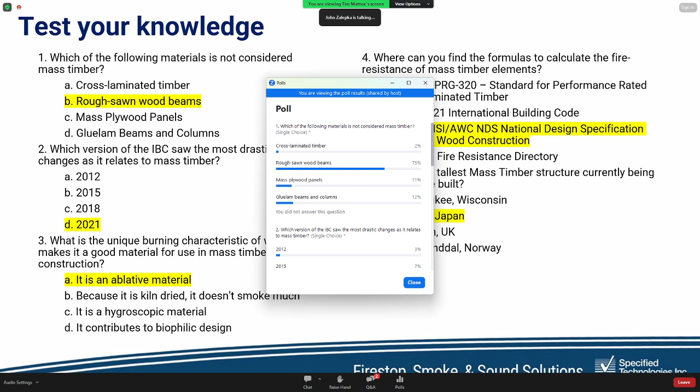Number 4: where can you find the formulas to calculate the fire resistance of mass timber? And that's going to be C - 47% of you got that one right. That's the ANSI AWC National Design Specification for Wood Construction.

And then finally, where is the tallest mass timber currently being proposed to be built? And that is Tokyo, Japan. 53% of you got that one right.